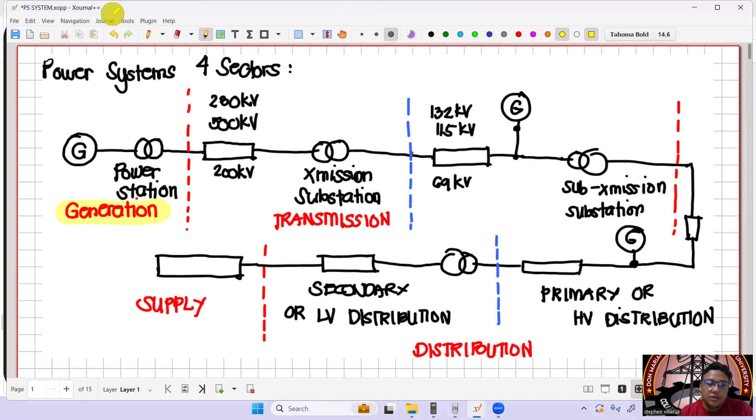Take note, our power system has four sectors. We have the generation, where the power station or power plants come in, where all the generators are. Then we have the transmission, wherein it transmits high power, then goes to our distribution, because the voltage steps down, going to the distribution utility. And lastly, we have the supply, where the consumer comes in.

In between these four sectors, it is guided by a line, which is called a transmission line. Take note, the transmission line carries our electrical power. These are called transmission lines, and these transmission lines carry high power, most commonly high voltage.

So where does the high voltage happen? In our transmission. So kilovolts are what our transmission line transmits going to distribution until it reaches the supply. Let's talk about that later on. So let's move on to our transmission line. We have the constants of transmission lines.

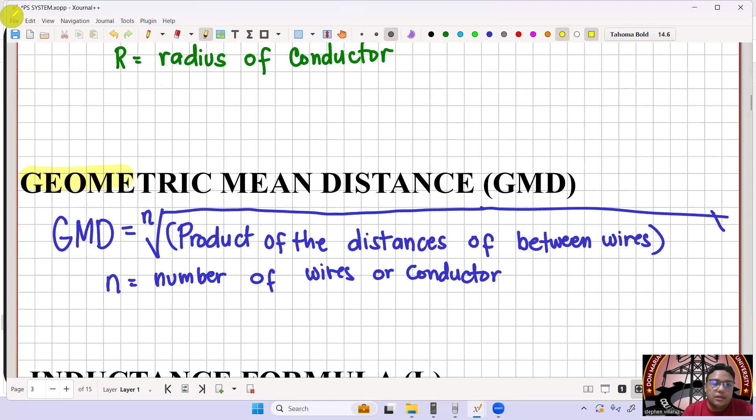We have first, the geometric mean radius, and second, we have the geometric mean distance. So what are these? When we say GMR or geometric mean radius, that is the effect of our current on the conductor itself. So your GMR is equal to the n-squared root of your self GMR multiplied by the product of the distances between the two strands.

For example, we have a stranded conductor. Most of the time, our transmission lines are stranded. We won't see a transmission line that is purely solid unless it is a cable. But for overhead transmission line, what we use is ACSR, aluminum conductor, steel reinforced.

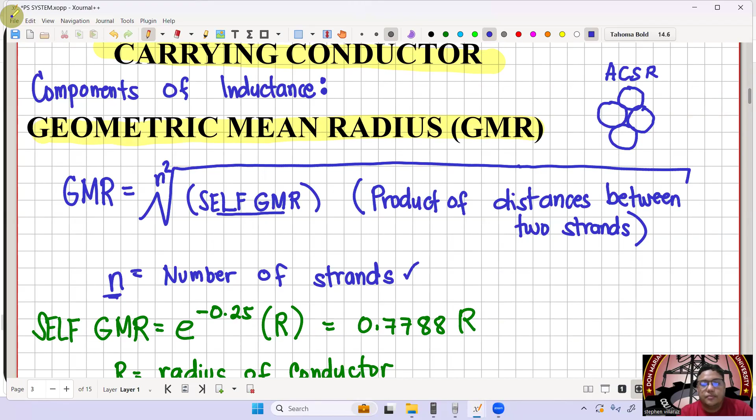So what is our formula again here? That is equal to the n-squared root of your self-GMR multiplied by the product of the distance between the two strands, wherein our n is the number of strands, and we have your self-GMR. From the word itself, self means sarili niya.

So this is now equal to e raised to negative 0.25r. So what does e to the negative 0.25 mean? This is 0.7788, times R, wherein our R is the radius of the conductor. So the radius of our conductor also has an effect on the geometric mean radius.

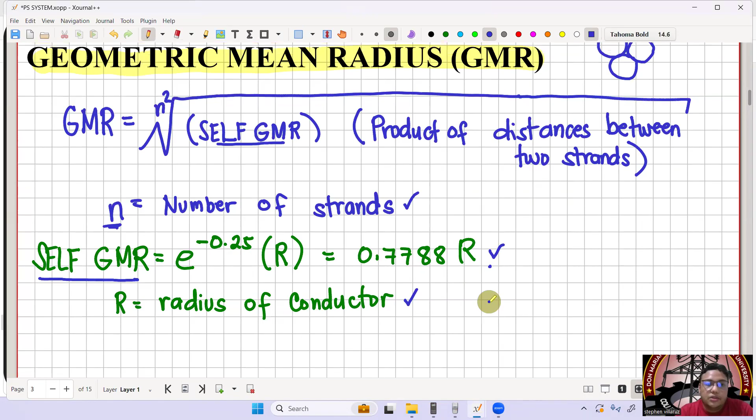Next, we have your geometric mean distance, also known as GMD. So what is this GMD? This is the nth root of the product of the distances between our wires. For example, in a three-phase system, our geometric mean distance is equal to the third root, because there are three wires, of the product of the distances between the wires. Let's say this is D12, this is D23, and this is D13.

And therefore, what's inside this is equal to the product of D12 times D23 times D13. So that's our geometric mean distance.

Sir, how about for a single wire or single phase, I should say? So paano kapag dalawang wire lang, sir? Kung ano yung distance mo dito, yun na yung GMD. So tsaka lang siya magiging komplikado kapag siya ay naka 3-phase, apat na phase. Pero most of the time, 3-phase tayo.

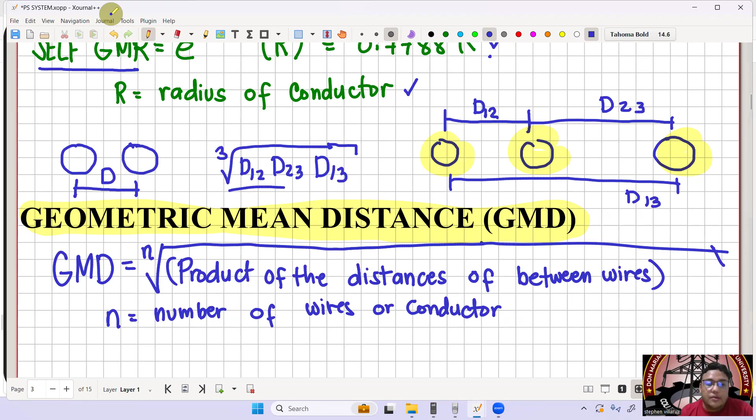Take note lang po dito, GMD and GMR. So ngayon, punta na tayo sa inductance formula. Ano naman po yung inductance formula natin?

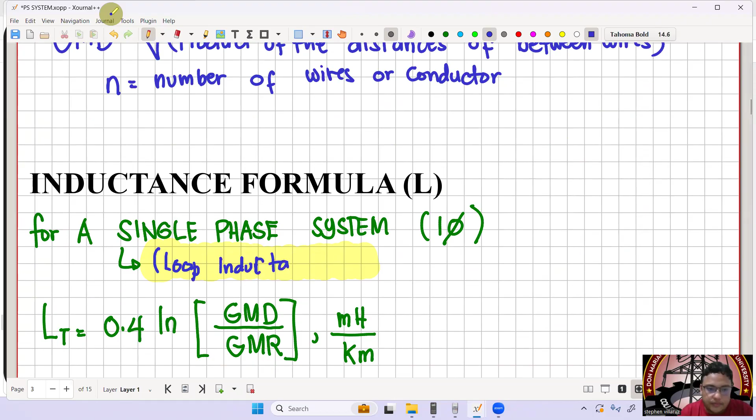So for a single phase system, your inductance will be called as your loop inductance. Yung loop inductance natin, that is equal to your total inductance.

And that is equal to 0.4 times the ln of GMD over GMR in millihenry per kilometer. Sometimes pwede rin ganito: yung 4 times 10 raised to negative 7 ln of GMD over GMR, pero siya ay naka-henry per meter naman to. It's up to you kung anong gusto nyong gamitin, yung 0.4 na multiplier or 4 times 10 to the negative 7. And this is only applicable for single phase.

Punta naman tayo sa three-phase system. So we have your L per phase or inductance per phase. So for your inductance per phase, this is equal to 2 times 10 to the negative 7 ln of GMD over GMR in Henry per meter. Or pwede rin natin gamitin yung 0.2 ln of GMD over GMR in millihenry per kilometer naman to. So yan po yung ating inductance, yung effect ng inductance dun sa ating transmission line.

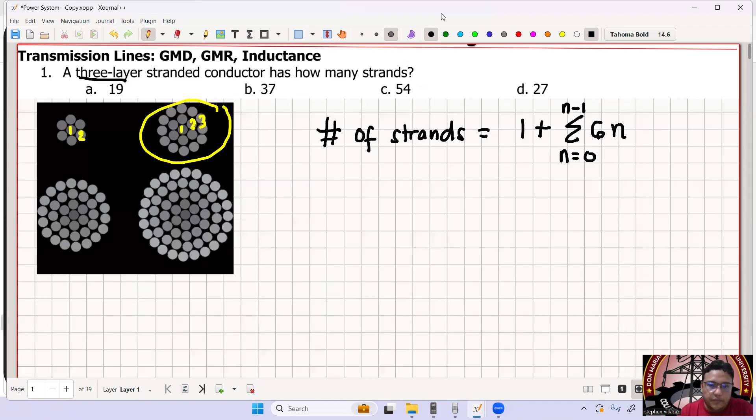So paano ba natin yan masosolve? Take note po, may formula na tayo dyan. The number of strands is equal to 1 plus the summation of 6n from n equal to 0 to n minus 1. Wherein yung ating n dito, this is the number of layers.

So kapag ilalagay natin to sa calculator, yung ating n dito, this is x. Sige, try natin siya. So that is now three layers. For a three layer, n equal to 3. Therefore here, yung ating 1 plus summation of 6x.

Take note po yung nandito, variable to. X from 0 to n minus 1. So ito lang yung magko-constant, yung n dito, number of layers. So this is now from 0 to 3 minus 1. So therefore, the number of strands is 19.

Kung gusto nyong i-check, bilangin nyo lang yung nandito na. 19 ito lahat. Ayan, so therefore, number of strands is 19. And therefore, the answer is letter A.

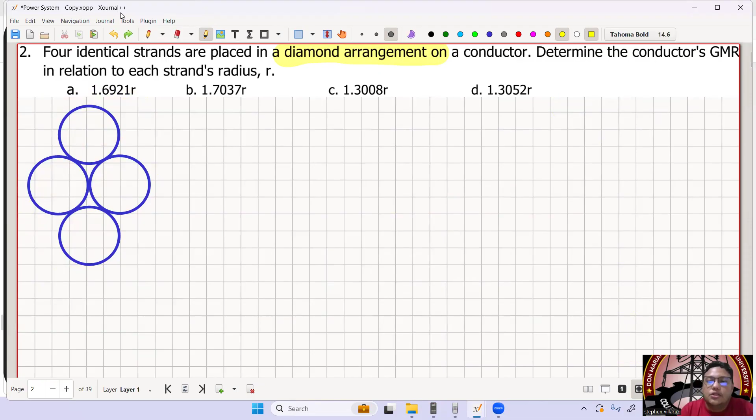So next, number 2. Let's go now to your GMR. Ito medyo kailangan natin dito mag-try ng konti. Four identical strands are placed in a diamond configuration or diamond arrangement. As you can see in the figure, naka-diamond siya. So determine the conductor's GMR. Ano daw yung GMR natin in relation to each strand's radius R? Take note po, per strand yung radius niya ay R.

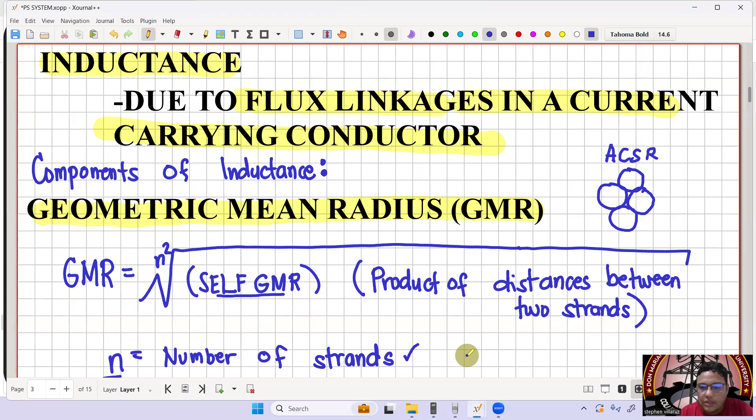So ito R. Paano natin makukuha ulit yung ating GMR? This is now equal to the n squared root of, balikan natin yung formula, self-GMR, multiplied by the product of distances between two strands.

For example, we have a diamond configuration. Let's call this strand 1, strand 2, strand 3, and strand 4. Strand 1, strand 3, strand 2, and strand 4. Ngayon, since apat na strands, n is equal to 4. Then kunin na natin yung self-GMR. Your self-GMR, from the word itself, sarili niya. So therefore, your D11 equal to D22 equal to D33 equal to D44 is your self-GMR.

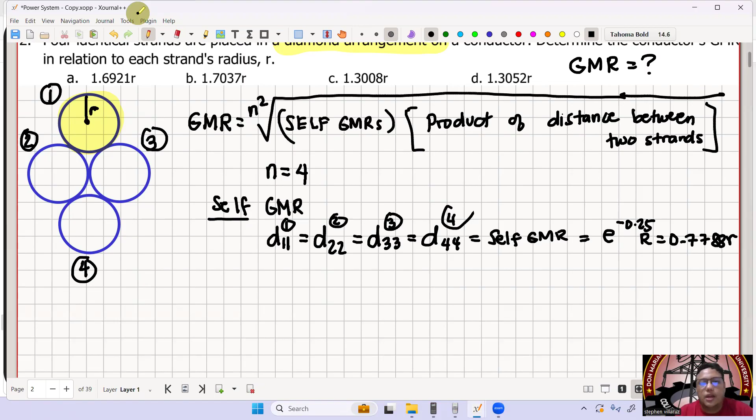Sarili niya. Ano ibig sabihin ng 11 dito? Ng conductor 1, ng conductor 2, ng conductor 3, at ng conductor 4. And this is now equal to e raised to negative 0.25, or that is equal to 0.7788 R. Ilang item na ganyan? Isa, dalawa, tatlo, apat. So, apat yung ilalagay natin dito sa loob.

Next, punta na tayo sa product of the distances between two strands. Unahin natin si 1 papuntang 2 and vice versa. So, D12 is equal to D21 is equal to what? This is R and this is R. Therefore, this is now equal to 2R.

Yung D13 at D31. So, this is R and this is R. So, this is also equal to D13 and this is also equal to D31. Ano pa? Ito at saka ito. So, this is R and this is R. So, therefore, this is also equal to 2R.

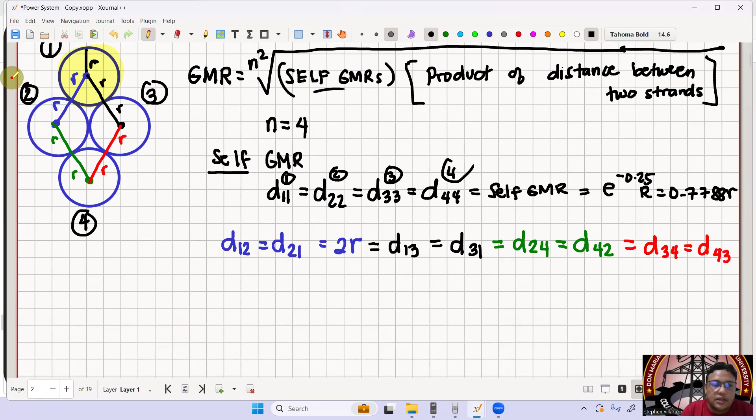So, that is D24 and D42. Ano pa? Ito. So, that is R and then R to R. So, this is also equal to D34 and this is equal to D43. Ano pa? Ito, yung nasa gitna. This is R and this is R. R plus R 2R. So, therefore, this is also equal to what?

This is also equal to D23 and equal to D32. Ayan, so ilan na? Isa, dalawa, tatlo, apat, lima, anim, pito, walo, siyam, sampo. So, 10 items ang ilalagay mo na 2R dito sa loob.

Ano pa? Take note po yung 1 going to 4. Hindi pa natin na i-take into account. So eto, gagamitin ko na lang ng color violet. Ito, papunta dito. Medyo ano natin, no? Pangit yung pagkakaano natin. Ayan siya. So, let's call this as D14. Pero, kung te-take into account natin dyan, para siyang magpo-form ng right triangle.

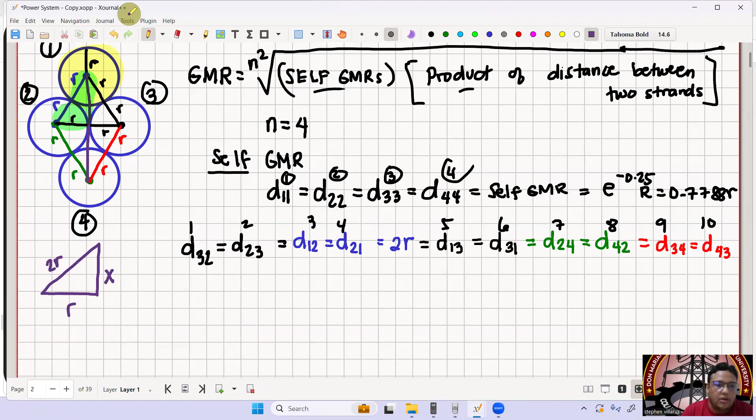So, itong portion na to, nag-form ng right triangle. Ito. So, therefore, edi kunin na lang natin yung kalahati ng D14. So, this is R, this is 2R, and this is x. So, paano natin makukuha yung x dito? So this is now by Pythagorean theorem. So therefore, x is equal to the square root of 2r the quantity squared minus r squared.

And this is now equal to the square root of 2 squared minus 1 squared. So this is equal to square root of 3 times r. Kung kukunin natin yung D14 dito, that is equal to D41, this is equal to 2x. Take note po, ito x ito, tapos dito sa baba, x rin yan. Tama po ba? Ayan, so therefore, this is now equal to twice ng square root of 3 multiplied by r. So, ilang item to? Isa, dalawa.

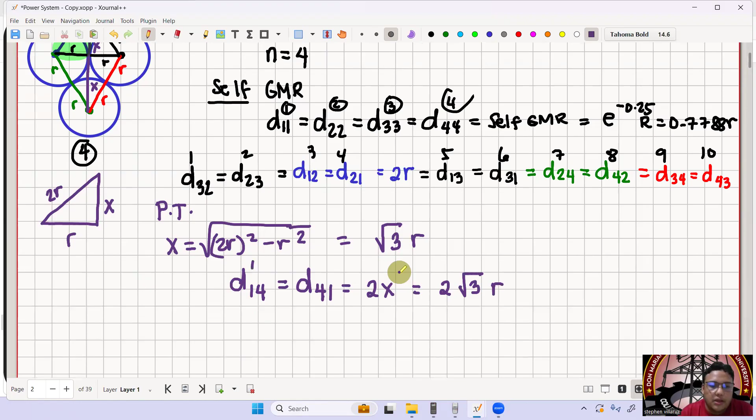So, therefore, pwede na nating i-evaluate yung formula natin. So, therefore, your GMR now is equal to 4 squared root of self-GMR. Self-GMR natin is 0.7788 R raised to what? Since apat na beses siyang naulit, so this is raised to 4, multiplied by yung 2R natin, ilang beses siya naulit? So this is 10, raised to 10, multiplied by yung ating 2 square root of 3 times r, raised to 2.

Ngayon, to check kung tama yung mga nilagay natin, dapat kung ano yung sum ng mga exponents, equal yan dun sa root. Kung ano yung root natin. So 4 squared is the 16th root, no? And then yung nasa loob natin is 4 plus 10 plus 2 is 16. So therefore, correct siya, na 16th root. So therefore, this is now equal to what?

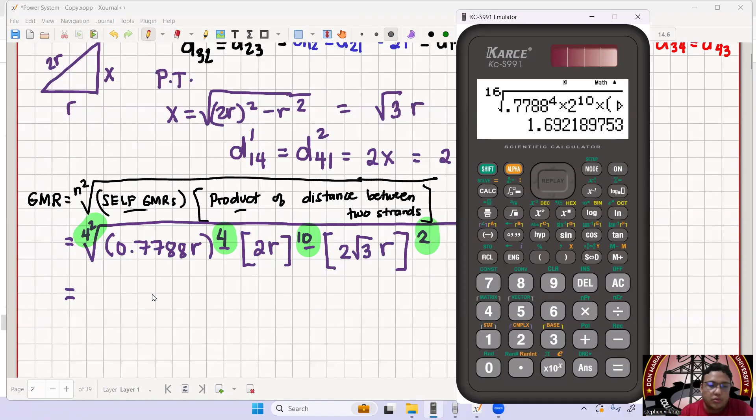So, evaluate natin sa calculator. 16th root of 0.7788 raised to 4, multiplied by 2 raised to 10, multiplied by 2 square root of 3, this is the quantity squared. So, therefore, this is now equal to 1.6922. So, 16th root of r raised to 16 is r. So, therefore, the GMR is equal to 1.6922 times r. Letter A.

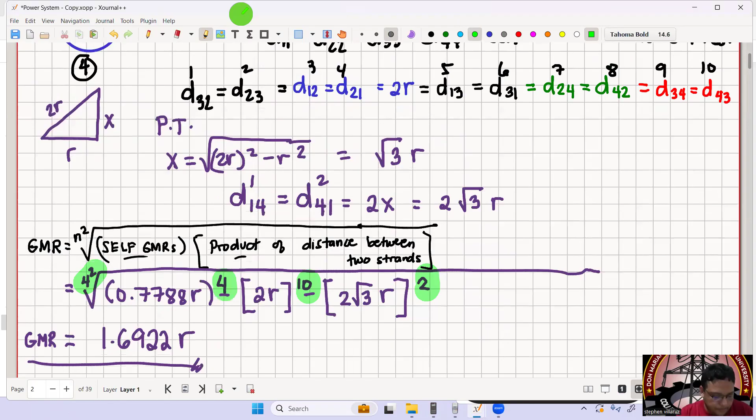Next tayo, number 3. So, a vertical arrangement of 3 similar conductors makes up a unique conductor. Meron daw tayong vertical arrangement ng mga conductors, patayo. So ito yon. So, utilizing R or radius R, yung radius natin ng isang strand dito is R. So, determine its GMR. Hanapin daw natin yung GMR.

So, take note po ulit ang GMR. This is equal to the n squared root of the self-GMRs multiplied by the product between two strands. So, products between two strands.

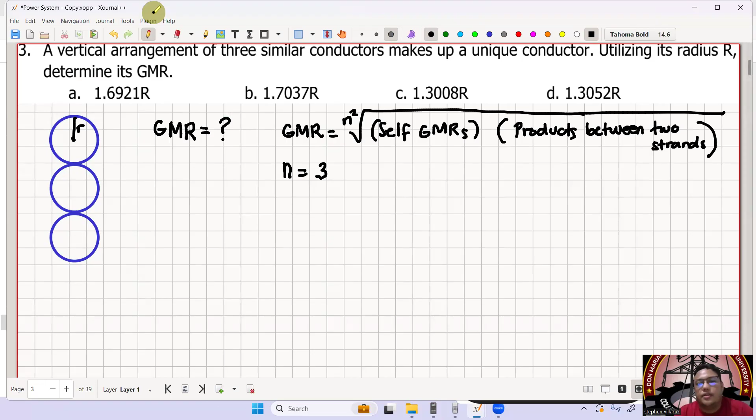Okay, so ilang strands meron tayo dito? So, 3. Okay, so therefore GMR natin ngayon, this is now equal to 3 squared, so this is 9. So this is the ninth root of self-GMR.

So ano yung mga self-GMR natin dito ulit? Let's call this as strand 1, strand 2, strand 3. Okay, so self-GMR, that is D11, equal to D22, equal to D33.

And this is equal to 0.7788 times R. Okay, ilagay natin dito, 0.7788 times R. This is the quantity cubed. So tatlong beses kasi siya - isa, dalawa, tatlo.

Then after which, yung product between two strands. So dito, that is now from D1 going to 2. So this is R, then R. So R plus R is 2R. Therefore, 2R is equal to D12.

This is also equal to D21. This is also equal to what? Okay, ano pa yung may 2R dito? Okay, yung D23. So from conductor to conductor 3, 2R rin yan. So this is equal to D23 and this is equal to D32.

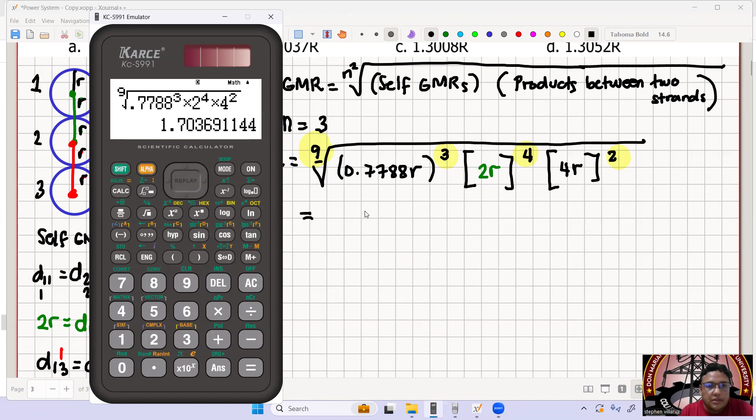So therefore this is now equal to 1.704. So 1.70, lagay ko na lang for decimal place, 37. So 37 times R. So this is your GMR. And this is letter B.

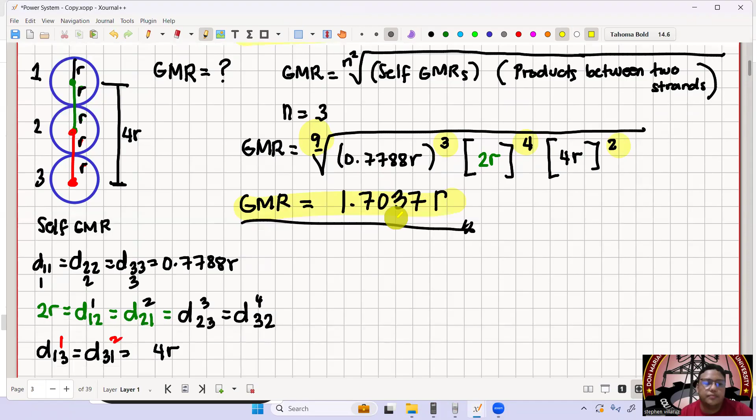Okay, so next tayo. Number 4. Okay, number 4 tayo. So punta na tayo sa inductance, no? Okay, inductance na, tapos na tayo sa GMR. So inductance na tayo. So the overall inductance of a 20-kilometer single-phase line.

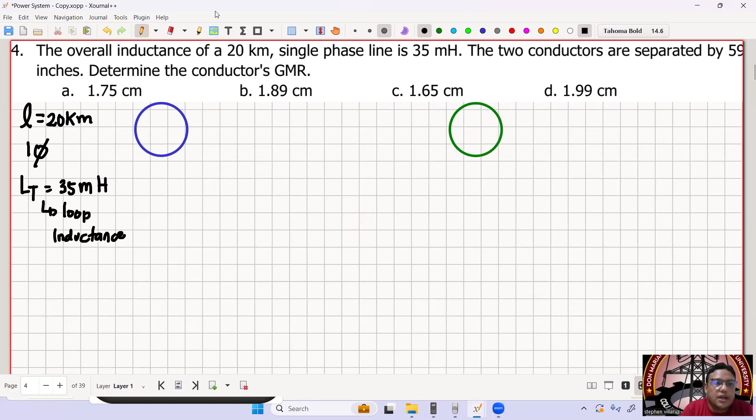So take note po, okay, yung length natin dito, 20 kilometers. Okay, yung ating system is a single phase. And yung ating overall inductance or total inductance dito, that is equal to 35 millihenry. So take note po, this is a loop inductance. Bakit loop inductance? Kasi siya ay single phase. Okay, single phase siya, kaya tinawag na loop inductance.

So the two conductors are separated by 59 inches. Okay, so yung separation nila, 59 inches. So determine the conductor's GMR. Okay, so take note po, hahanapin natin daw yung GMR.

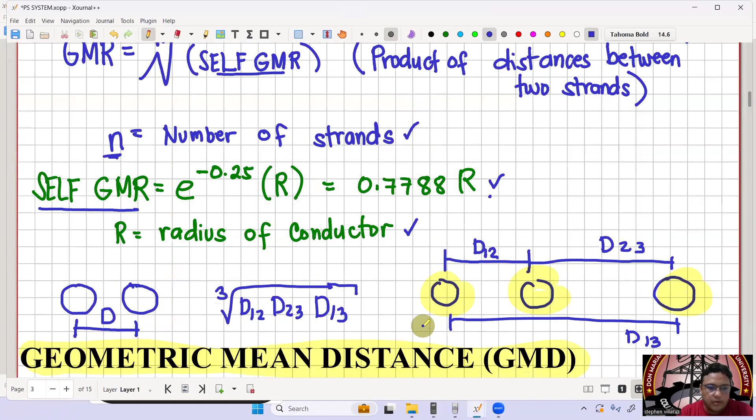Okay, so for a single phase inductance, so this is your loop inductance. And kapag loop inductance, so going back to the formula, single phase, dito, so kapag single phase, 0.4 ln of GMD over GMR in millihenry per kilometer. So therefore LT now is equal to 0.4 ln of GMD over GMR, and this is in millihenry per kilometer. So i-discuss ko lang yung formula sa inyo, no?

So take note po dito, naka-enclose yung ln sa GMD over GMR. So ang conditions dito is what? So yung conditions dito is that same yung units, yung GMD at saka yung GMR. So otherwise, kung hindi sila same units, you need to convert, okay? Kasi dito, ang mangyayari dito, magka-cancel lang yung unit dito.

Okay, ang magke-carry over ng overall units natin dito, so ang i-carry over na unit niya is millihenry per kilometer. Pero yung nandito sa loob, magka-cancel kasi to. Okay, magka-cancel yung unit natin dyan. Okay, kaya dapat same dapat yung units. Okay, ganun rin dito sa three-phase system, no? So kalimitan na mali ng mga estudyante is that hindi sila nagko-convert. Tamad silang mag-convert. Okay, so kailangan lang nating pagpasensyahan itong formula na to. Kasi kailangan nyo talaga mag-convert.

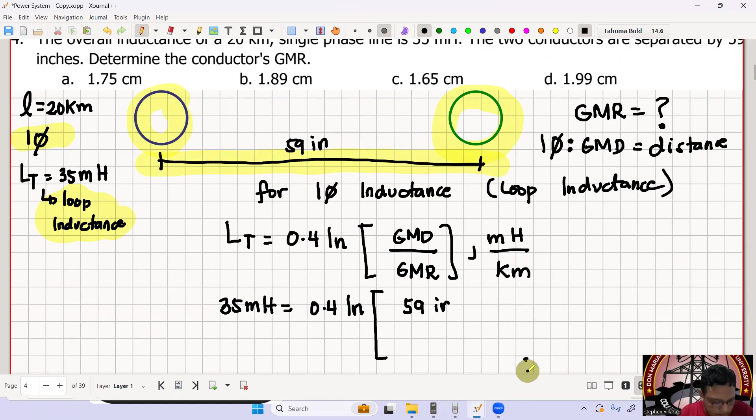So, that is now equal to 59 inches. Is this the unit we want? Not yet, because the unit we want is centimeters. So the unit inside our working equation should also be in centimeters.

So we need to convert. This is now multiplied by: 2.54 centimeters is 1 inch. So all over GMR, this is the unknown, and this is in millihenry per kilometer.

But we still have per kilometer here. So what do we do with the per kilometer? Since the left side is only in millihenry, we multiply by the length, which is 20 kilometers. Let's see what cancels out: millihenry, millihenry cancel, kilometer, kilometer cancel, inch and inch cancel. So what remains is centimeter. So what's your GMR in centimeters?

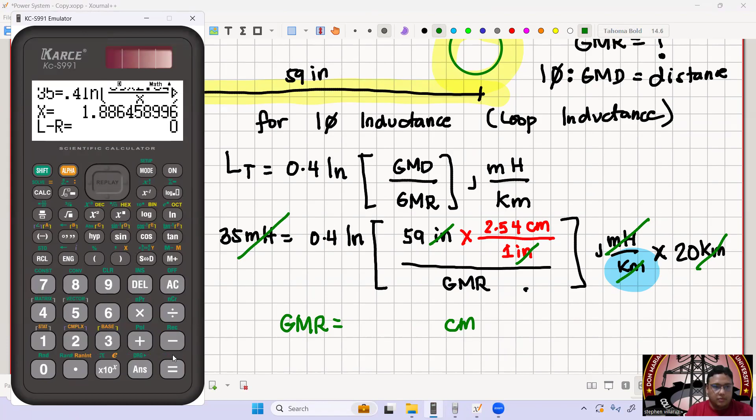So, 35 equals 0.4 ln of 59 times 2.54 all over x, multiplied by 20. So this is now equal to 1.886, or 1.886 centimeters, that is 1.89 centimeters. And this is letter B.

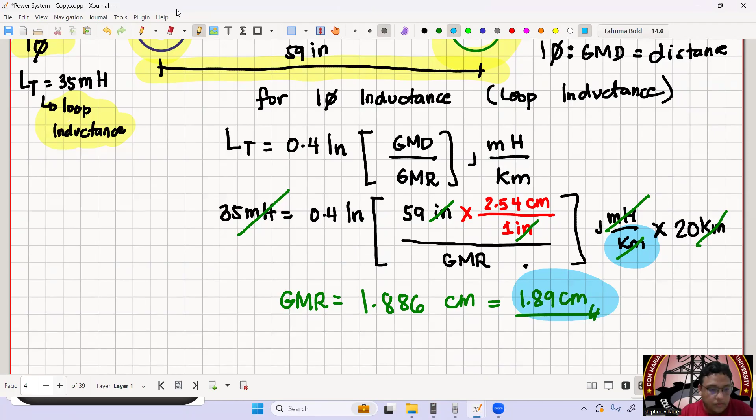Number 5. This is three-phase now. So the conductors in a three-phase, take note, three-phase, 60 Hertz transmission line are organized in a triangular configuration, as you can see in the figure. It's a triangle, with two conductors spaced 5 meters apart, and a third at 8 meters.

So here, the spacing is 5 meters, here 5 meters, and here 8 meters. Those are their spacings. Now, the conductors are 0.25 inches in diameter on the exterior. So determine the transmission line's inductive reactance in ohms per kilometer for each phase.

Take note, inductive reactance is what we want. So therefore, XL - from your circuits subject, that's XL, but per phase. So that's what's being asked. So, what's XL per phase? What's the formula for that? That is 2 pi times F times L per phase.

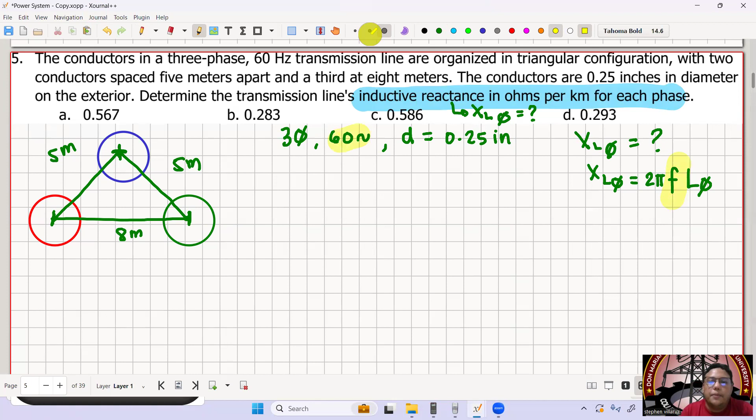We already have F here, but unfortunately we don't have L per phase yet, so we need to get that. And since this is a 3-phase system, the L per phase formula is: 0.2 ln of GMD over GMR, in millihenry per kilometer.

So this is now equal to what? Our L per phase is now equal to 0.2 ln of GMD. But what's your GMD? Since it's 3-phase, we take the cube root. Cube root of 5 times 5 times 8, and this is in meters.

All over GMR. Take note, our GMR here is equal to 0.7788 times R. Let's place that here: 0.7788 times R. But what's your R? We don't have R, we were only given the diameter.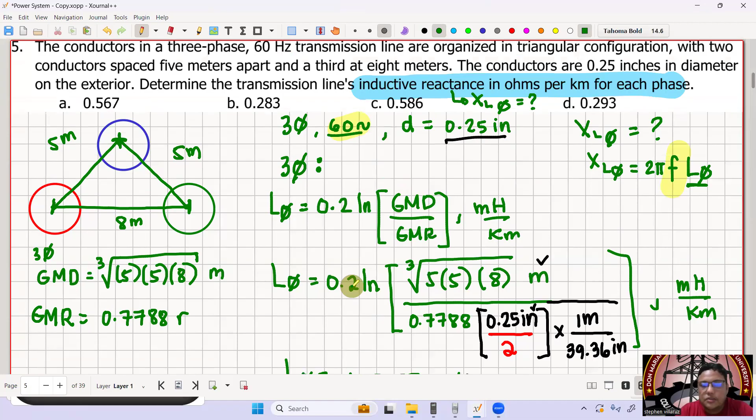Now we can get the XL per phase. Using this formula, XL per phase is now equal to 2 pi times F times L per phase. So this is now equal to 2 pi times the frequency. What's our frequency? 60 Hertz, multiplied by 1.5537 times 10 to the negative 3, because it's milli.

This is where our students often make mistakes again. So when using 0.2 ln, please take note, it's milli, so times 10 to the negative 3. So this is in Henry per kilometer. So this whole thing becomes ohms.

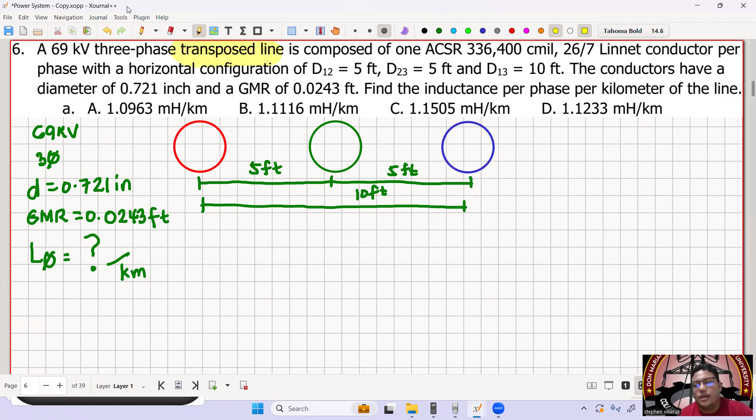When we say transposition, this is used in practice. This is used by NGCP and different electrical transmission companies. So take note of what happens.

In practice, the three conductors of a three-phase line are seldom equilaterally spaced. Why is it not equilateral? Because there are unequal inductances in our three-phase system.

This leads to unequal voltage drop. So to achieve balance or to offset this imbalance, the position of the conductors is interchanged along the line.

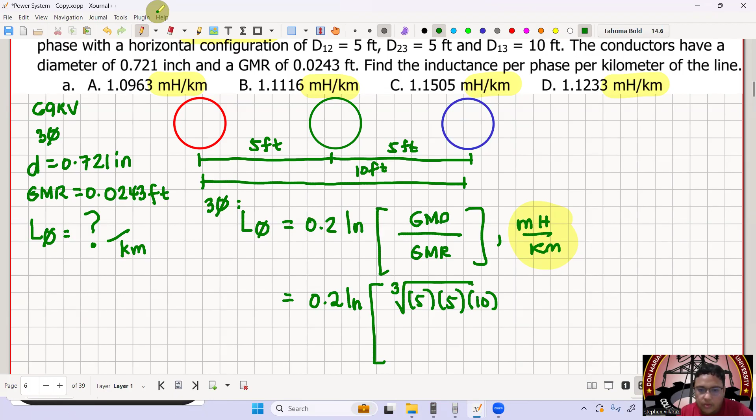This is now equal to 0.2 ln of, take note, our GMD — since it's three-phase, we take the cube root: cube root of 5 times 5 times 10, in feet, all over our GMR, which is given as 0.0243 feet, and this is in millihenry per kilometer.

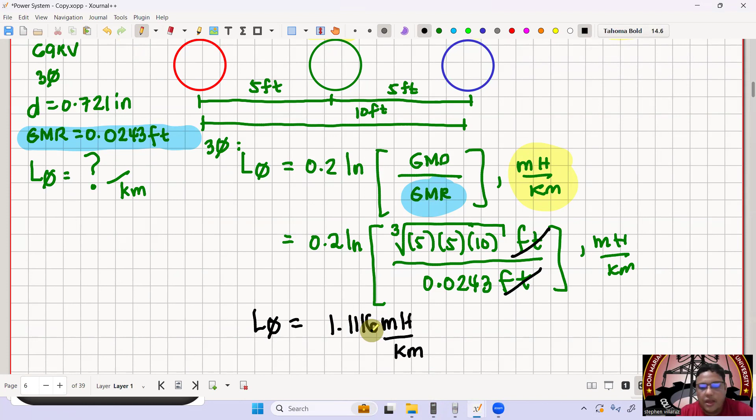Are the units inside compatible? Yes, perfectly compatible, so they cancel out and we can evaluate. So L per phase is 0.2 ln of cube root of 5 times 5 times 10, all over 0.0243, in millihenry per kilometer. That gives us 1.1116 millihenry per kilometer. So the answer is letter B.

Okay, let's move to the next topic: bundled conductors. Why do we bundle conductors? First, it's to reduce inductance, which reduces the effect of inductance on our circuit. When inductance is reduced, efficiency increases and we get better percent regulation. Also, we bundle conductors to reduce skin effect.

Skin effect happens because when our current is AC, it tends to focus only on the outer covering of the conductor. So all the current is there, none in the middle. That's the effect of AC when it comes to skin effect — from the word 'skin' itself, referring to the outer covering.

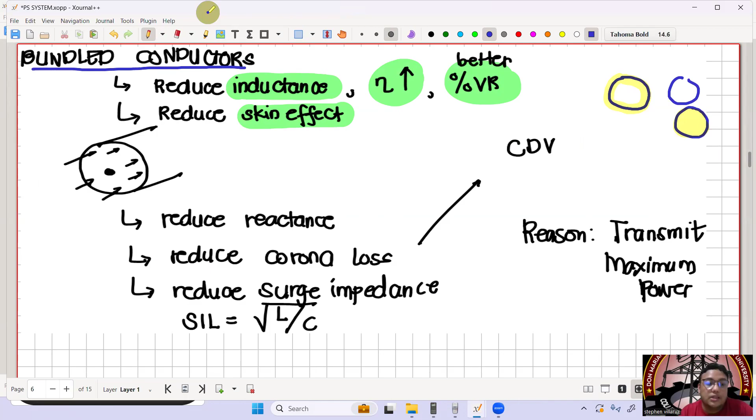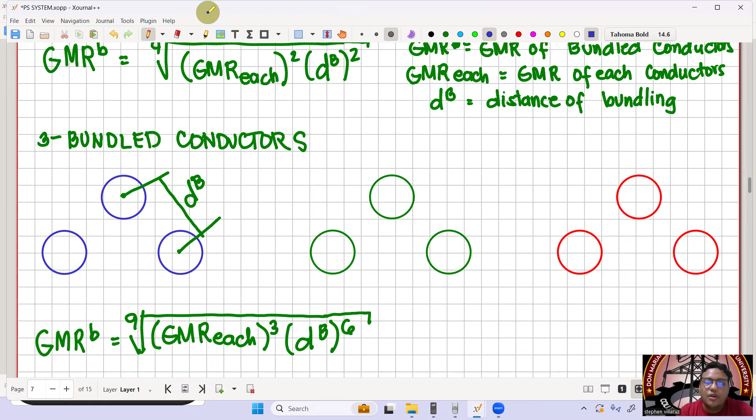For example, here we have two bundles, meaning two conductors per phase. We also have 3 bundled conductors, meaning 3 conductors per phase. And aside from 3 and 2, there's also 4 bundled conductors per phase — phase A, phase B, phase C. Usually, as the voltage carried by the transmission line increases, it has more bundles.

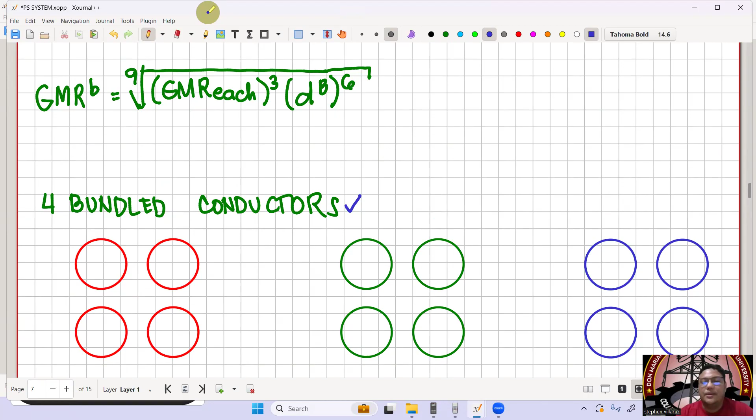Okay, so for two bundled conductors, take note po dito. Isa sa alang-alang natin yung ating dB, this is the distance of bundling, yung distansya ng bundled conductors natin. So we have also your GMR each, GMR ng kada conductors natin. Take note po, may GMR to, may GMR to, pare-parehas lang yung GMR niyan.

And also yung ating GMR bundled, GMRB. GMRB is the GMR of bundled conductors, parang overall GMR kumbaga. So therefore yung GMR bundled natin, that is equal to the fourth root of GMR each squared multiplied by distance of bundling squared. Or pwede rin natin tong isaayos, gawin natin siyang square root na lang. So for two bundled conductor, GMR bundled is equal to the square root of GMR each multiplied by the distance of bundling. So ito na lang gamitin natin, ito, simplified na kasi siya.

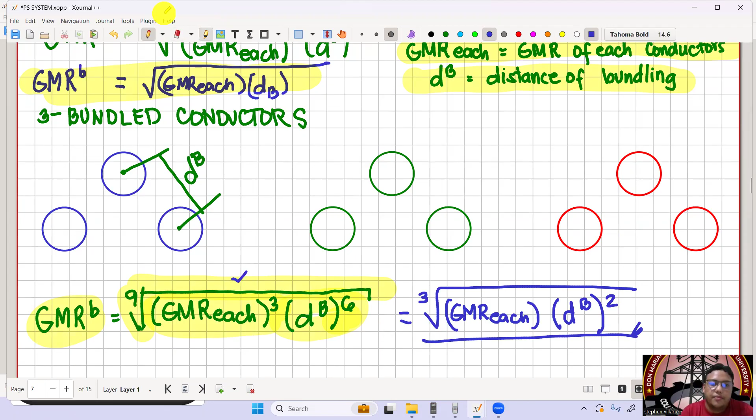Okay, so for 3 bundled naman, that is now equal to what? GMR bundled is equal to the 9th root of GMR each raised to 3 multiplied by distance of bundling the quantity raised to 6. Or pwede rin siyang cube root of GMR each multiplied by distance of bundling the quantity raised to 2. Pwede rin yan, so pwede nyo rin tong gamitin instead na ito na lang.

For 4 bundled conductors, that is 1.09 multiplied by the fourth root of GMR each multiplied by distance of bundling the quantity raised to 3. And for the inductance per phase of bundled conductors, yung ating L per phase now for bundled conductors is 0.2 ln of GMD per phase all over GMR bundled, in millihenry per kilometer. Yung ating GMD dito, GMD na lang yan, parehas rin yan, GMD per phase or GMD.

Sige, try nating magsagot. Number 7, ito, bundled conductors. A 230 kilovolts, 60 hertz, three-phase circuit transposed transmission line is made up of two 1,272 MCM 54/19 conductors, meaning two conductors per phase, and this is arranged horizontally or pahiga.

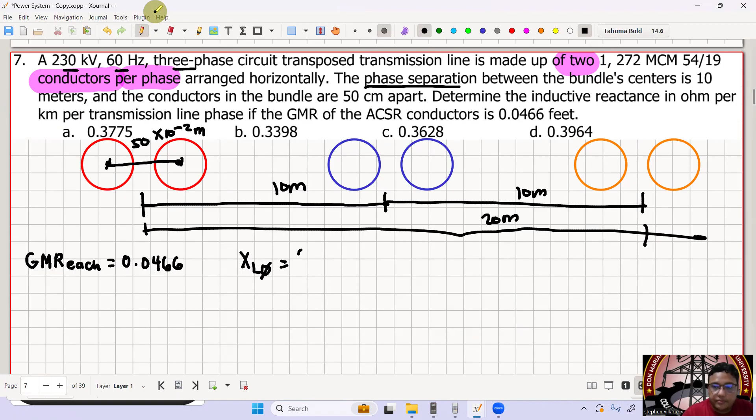So hinahanap is XL per phase. Paano na yan? Take note po, XL per phase is equal to 2 pi F times L per phase. But for bundled conductors, yung ating L per phase is equal to 0.2 ln of GMD over GMR bundled, this is now in millihenry per kilometer. And for two bundled conductors, yung ating GMR bundled is equal to the square root of GMR each multiplied by the distance of bundling.

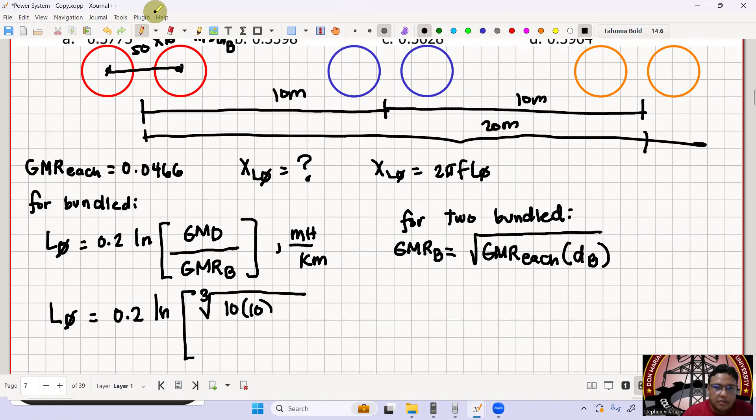So yung distance of bundling natin dito is 50 centimeters. Okay, so therefore this is now equal to: L per phase is equal to 0.2 ln of GMD, cube root of 10 times 10 times 20, this is in meters, all over GMR bundled, square root lang yan, square root ng GMR each.

So this is naka-feet na 0.0466 feet, pero hindi pa yan match dito, hindi yan match dito sa numerator natin. So we need to convert. This is now multiplied by, in 1 meter, ilang feet? 3.28 feet, multiplied by the distance of bundling. So ilan yung distance of bundling natin? 50 times 10 to the negative 2, and this is in meters. So since compatible na yung mga to, cancel lang ito.

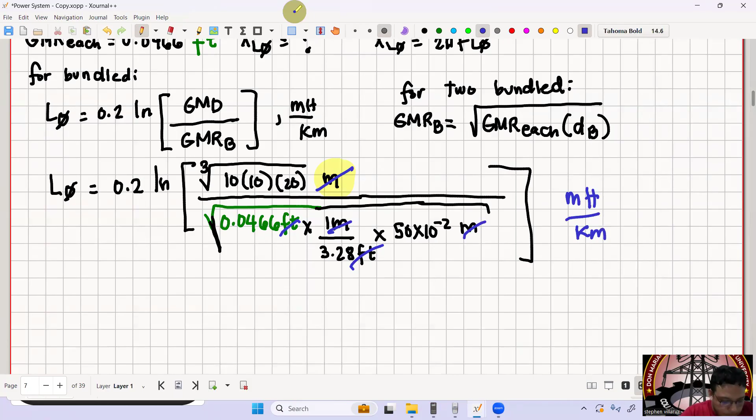Ayan, so this is now in millihenry per kilometer. Therefore L per phase now is equal to 0.2 ln of cube root of 10 times 10 times 20 all over square root ng 0.0466 times 1 over 3.28 times 50 centi. So therefore this is now equal to 1.00144 millihenry per kilometer. Or this is now equal to 1.00144 times 10 to the negative 3 Henry per kilometer.

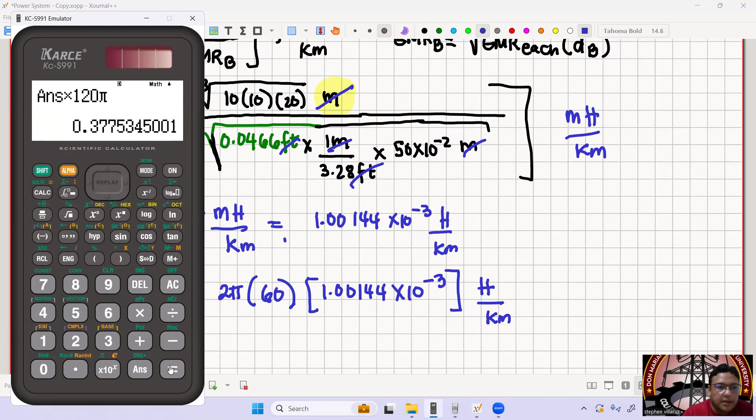Ayan, so therefore anong gagawin na natin dito? Pwede na natin siyang ilagay sa XL per phase. So XL per phase is 2 pi F L per phase, this is now 2 pi times frequency, ilang frequency natin? 60 hertz, multiplied by your L per phase, 1.00144 times 10 to the negative 3 Henry per kilometer. So times 10 to the negative 3 lang natin to, multiplied by 120 pi. So therefore this is now equal to 0.3775 ohm per kilometer, letter A.

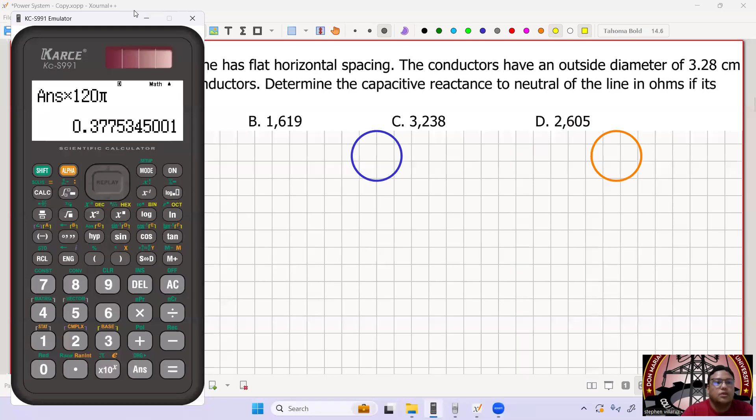Okay, next tayo, number 8. So a three-phase 60 hertz line has a flat horizontal spacing. So the conductors have an outside diameter of 3.28 centimeters with 12 meters between conductors.

Take note po dito, iba na yung hinahanap dito, no? Capacitive reactance na. So let us talk about the third constant of your transmission line, which is your capacitance.

Okay, so yung capacitance natin usually, ang model niyan sa transmission lines natin is always nakadirect sa ground. So para siyang nakashunt. Ayan, so this is your capacitance.

Okay, and your capacitance now, the shunt capacitance per unit length of a single phase two-wire transmission line is given by this formula. So kapag single phase, ito. So always siyang nakashunt, yung capacitance natin, shunt yan. So C is equal to pi epsilon naught over ln of D all over R.

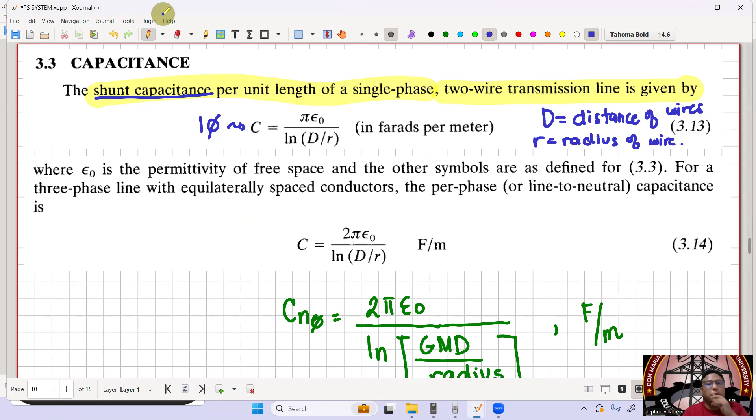So wherein yung D natin, this is your distance of wires. And yung R, this is the radius of your wire or conductor. Okay, so kapag naman siya ay three-phase...

So ito naman yung gagamitin natin, this is for three-phase. So C is equal to 2 pi epsilon naught all over ln of D over R. So wherein yung D natin dito ay equal to your GMD, and your R is your radius.

Okay, or this is now equal to what? So this is your C per phase. So anong basa dito? So this is your capacitance to neutral. So capacitance to neutral per phase is equal to 2 pi epsilon naught all over ln of GMD over your radius.

And this is in farad per meter. Take note lang ulit dito sa loob, katulad lang doon sa L natin, so yung units dapat dito are the same. Okay, so yung GMD mo kung meter yan, dapat yung radius mo meter rin, kasi ang magpre-prevail na unit dito sa overall na ito is yung farad per meter lang. So dapat compatible yung units mo dito sa loob, compatibility ang hinahanap natin dito.

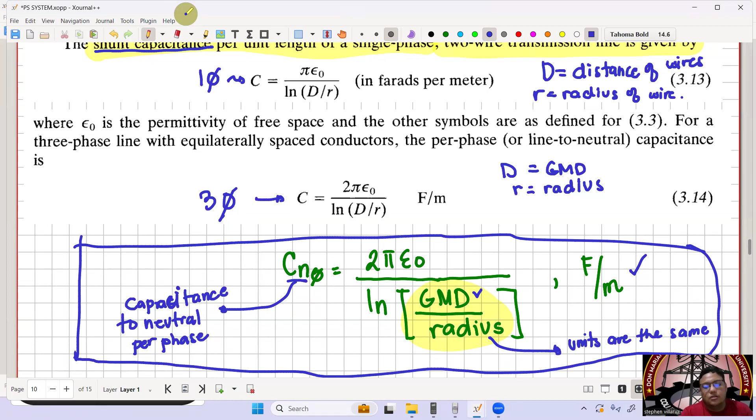So ito ang usually na nagagamit natin kapag capacitance to neutral per phase when it comes to three-phase. Okay, and how about naman yung reactance? Kanina sa problem natin, reactance yung hinahanap, no? Okay, so yung ating XC per phase now is equal to, from your circuits 2, that is 1 over 2 pi F times yung ating C per phase.

Sige, let's try to solve number 8. So a three-phase 60 Hz line has flat horizontal spacing, so nakahiga, horizontal. So the conductors have an outside diameter, yung D natin dito is 3.28 centimeters, with 12 meters between conductors. So ito, 12 meters, ito, 12 meters, ito, 24 meters.

So determine the capacitive reactance to neutral of the line in ohms if its length is, yung length binigay, this is equal to 125 miles. Okay ayan, so XC yung hinahanap.

Pero ano ulit yung XC ulit? So that is equal to 1 over 2 pi F times C per phase. Pero wala pa tayong C per phase, okay, so kunin lang natin siya.

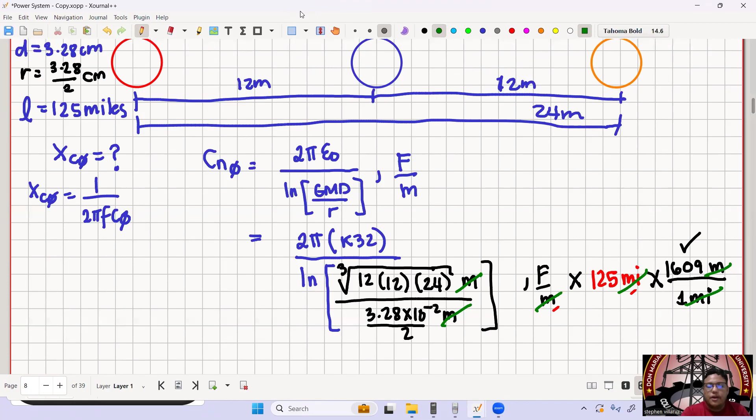So ilan na to? So this is now 2 pi times constant 32 all over ln ng cube root ng 12 times 12 times 24 all over 3.28 over 2. So this is in farad per meter multiplied by 125 times 1,609. So therefore, this is now equal to... kulang pa. Kalimutan ko yung times 10 to the negative 2 dito.

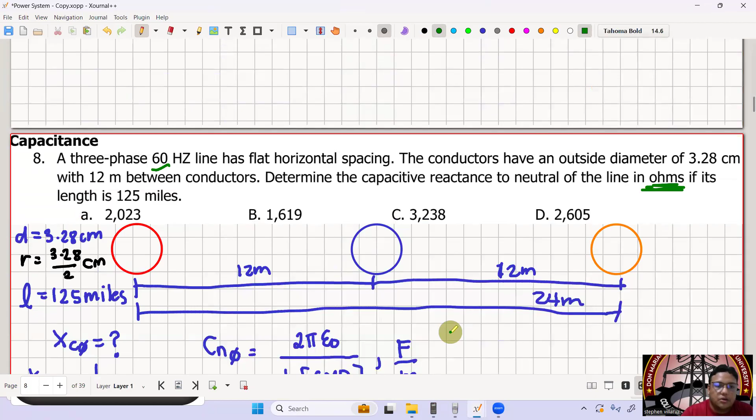Ayan siya. Okay, so this is now 1.639 times 10 to the negative 6. So 1.639... 0.83341 times 10 to the negative 6. So this is in farads na, microfarads. Okay? Then kunin na natin yung x per phase natin or xc per phase. So that is now 1 over 2 pi fc per phase. So this is now 1 all over 2 pi times f. Ano yung f natin? So ilang hertz? 60 hertz. Multiplied by 1.639083341 times 10 to the negative 6. So lahat to ohms na to. So 1 all over 2 pi times 60 times answer. So therefore, this is now equal to 1,618.33. So 1,618.33 ohms. Or this is approximately equal to, okay, letter B.

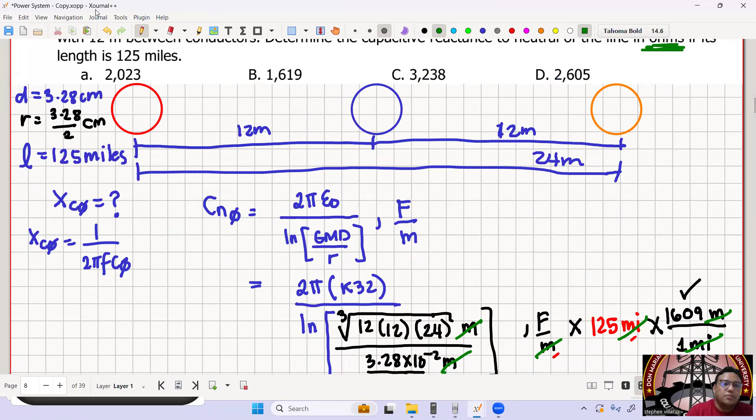Okay, let's move on to number 9. So a 115 kV three-phase transposed transmission line is composed of two ACSR conductors. So dalawang ACSR of 336,400 circular mil, 30 over 7 Oriole conductors. So two ACSR conductors per phase. So meaning siya ay two bundled.

Okay, two bundled. So with horizontal configuration, D1 going to 2 is 7 feet. D2 going to 3 is 7 feet. And D1 to 3, that is equal to 14 feet. So the line spacing is measured from the center of the bundled conductors. So the distance between the conductors of the bundle is 6 inches. So the conductors have a diameter of 0.741 inch. So D is equal to 0.741 inch. And GMR, that is equal to 0.02255 feet.

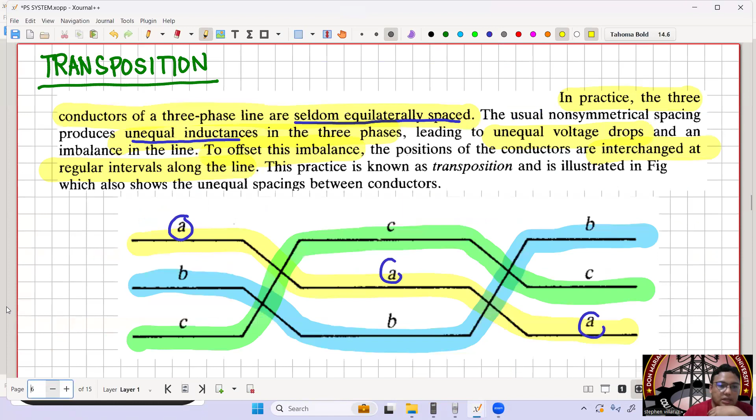So kung meron tayong L per phase kanina na bundled, meron rin sa capacitance. Okay? So take note lang po dito. So for two bundled siya. Okay? So instead na GMR each yung gagamitin natin dito. So kanina dito kasi is GMR each. So eto, instead na GMR each, papalitan lang natin yan ng radius. Okay, ng R. Okay? So RB, radius of bundling na yan.

So yung RB natin or yung GMR bundled sana natin is yung ating radius of bundling. So this is the overall radius. So yung R each naman, that's the radius of each conductor. So kada conductor dito. Then we have also your dB, which is your distance of bundling. Ngayon, kukunin lang natin yung radius of bundling, that is equal to the fourth root of RH squared multiplied by your dB, the quantity squared. Or pwede pa natin yung i-simplify, that is now equal to the square root of RH or radius of each conductor multiplied by the distance of bundling.

For 2 bundled. So for 3 bundled naman, palitan lang natin yung GMRH dito ng RH. Then dito, GMR bundled, palitan lang natin ng R bundled. Okay? Radius lang lagi dito. So therefore, yung radius of bundling natin is equal to the 9th root of RH, the quantity cube, multiplied by distance of bundling raised to 6. Or this is now equal to the cube root of RH multiplied by distance of bundling the quantity raised to 2. Ayan, so ito na lang gamitin natin.

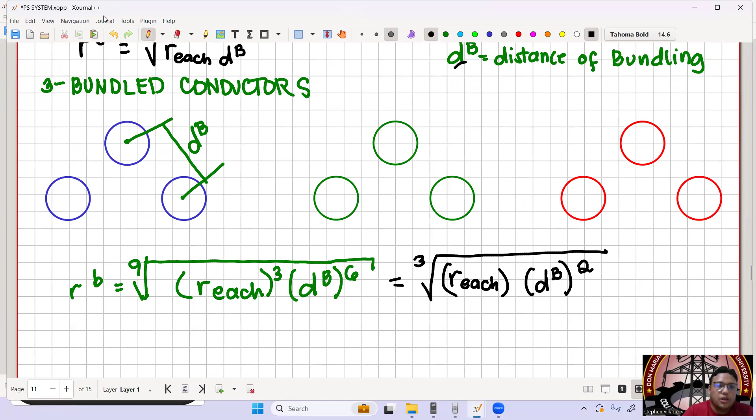For 4 bundled conductors, yung ating RB or radius of bundling is equal to 1.09 times the fourth root of RH multiplied by yung ating distance of bundling, the quantity cube. Okay? And for bundled conductors, yung ating capacitance to neutral per phase is equal to 2 pi EO all over ln of GMD over the radius of bundling. So this is now in farad per meter. Okay, so sige, ayun natin siya.

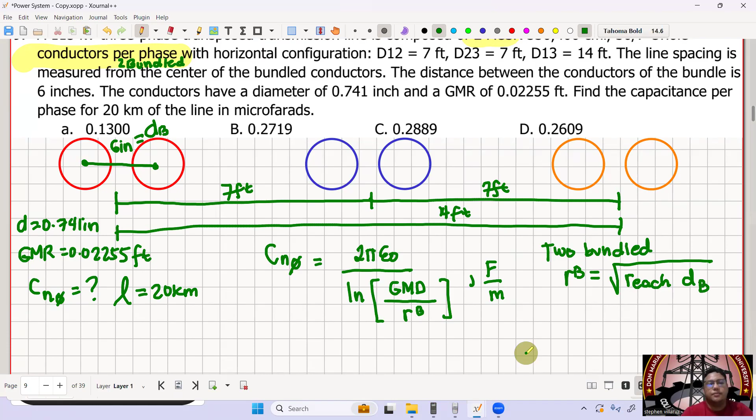Balikan lang natin to. Okay? 2 bundled siya. So therefore, yung ating capacitance to neutral per phase is equal to 2 pi times EO all over ln ng GMD all over radius of bundling. So this is now in farad per meter. But your radius of bundling for 2 bundled, yung ating RB, is equal to square root ng RH multiplied by your distance of bundling. Okay? Ayan, so apply natin yan dito, no? Kagad. So therefore, this is now capacitance to neutral per phase is equal to 2 pi times EO, constant 32, all over ln ng GMD.

So, ano yung GMD natin dito? Cube root. So, cube root ng 7 times 7 times 14. This is in feet. All over radius of bundling natin.

So, RH is wala pa. Take note po dito, may diameter tayo dito na 0.741. So, gawin lang natin yung radius. So, this is now R is equal to 0.741 divided by 2 in inches. Okay? So, sige natin.

0.741 over 2, but this is in inches, so we need to convert. I-convert natin yan into feet kasi yung numerator natin dito sa taas or yung GMD natin naka-feet. So, this is now multiplied by 1 foot, that is 12 inches.

Okay, ano pa? Yung distance of bundling natin. So, ilan yon? So, 6 inches. So, multiply lang ulit tayo ng conversion factor. 1 feet or 1 foot is 12 inches.

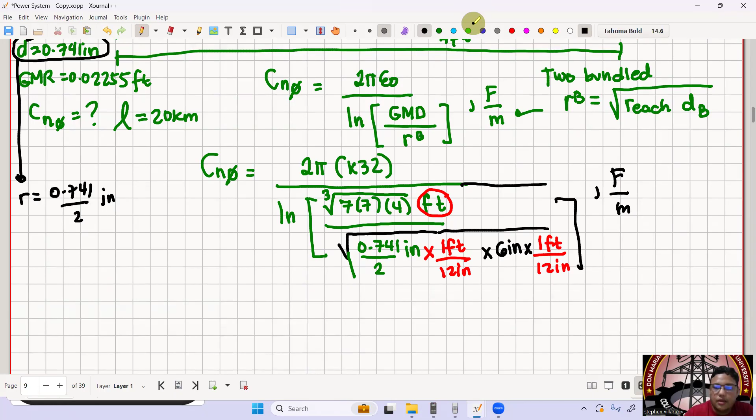So, this is now in farad per meter. Okay, so therefore, this is now equal to what? Okay, so farads yung gusto natin dito. Multiply pa natin yan sa length pala. Okay, nakalimutan natin yung length. Kasi naka-farad per meter na to, no? So, multiply lang natin sa length. So, multiply it by 20 kilometers or that is 20,000 meters. So, ano na magka-cancel dito? So, yung meter at saka yung meter, cancel yan. So, ano pa? Inches, inches. Feet, feet, then feet dito.

Okay, so therefore, what's now your capacitance to neutral per phase? So that is now 2 pi times constant 32 all over ln ng cube root of 7 times 7 times 14. Yan. So before natin makalimutan, 14 all over

square root ng 0.741 over 2, times 1 over 12, times 6 times 1 over 12. So close parenthesis dito. Then dun sa labas, i-multiply natin ng 20,000.

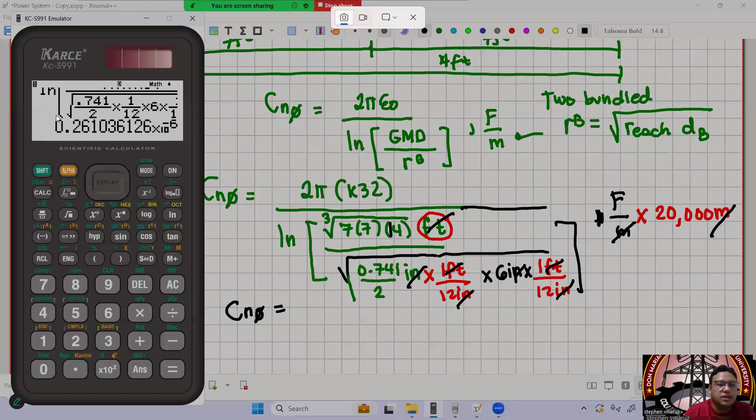So therefore, this is now equal to 2.610 times 10 to the negative 7, or i-shift lang natin siya. So ito na yung magiging sagot natin. So this is in microfarads. So that is 0.2610 times 10 to the negative 6 farad, or this is 0.2610 microfarads.

Letter, okay, letter D.

Okay, number 10. So calculate the capacitive reactance in kilohm kilometer of a bundled 60 hertz three-phase line having 3 conductors per bundle. So tatlong conductors na to per bundle. So between conductors of the bundle, sorry, ulitin ko. So three-phase having 3 conductors per bundle with 45 cm between conductors in bundle.

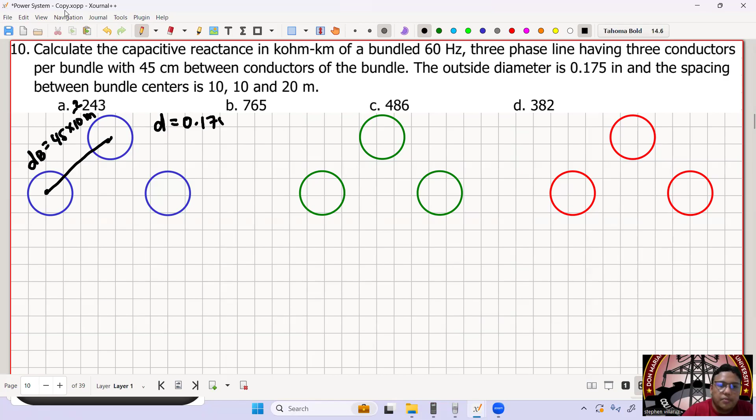So yung distance of bundling daw natin dito, so dB is equal to 45 times 10 to the negative 2 meters. So outside diameter, so yung D natin is equal to 0.175 inch and the spacing between the conductors is 10, 10, then 20. Okay, 20 meters. Yan.

Sige. Ano lang natin siya. Solve na natin yung ano dito. Capacitive reactance. So, XC. So, pero wala pa tayong C per phase. Okay, kunin muna natin yon.

Cn per phase is equal to 2 pi times ε0 all over ln ng GMD over R bundled. This is in farad per meter. Take note po, 3 bundled siya.

So therefore, yung radius of bundling mo is equal to the cube root of R each multiplied by, okay, distance of bundling, the quantity is squared. Okay? So sige, lagay na natin.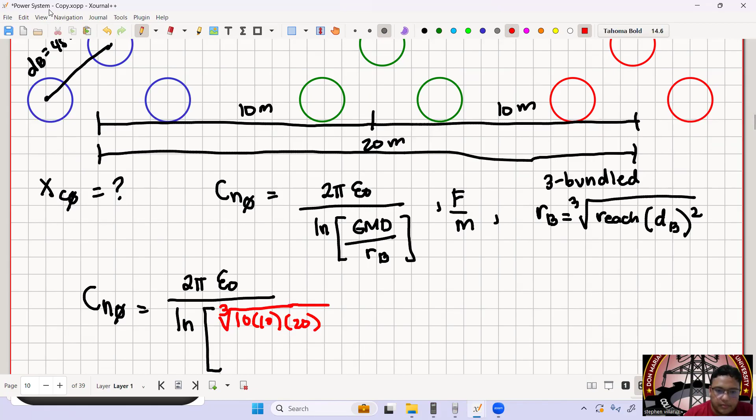So capacitance to neutral per phase now is equal to 2 pi EO all over ln ng GMD. So that is cube root. Okay? Cube root ng 10 times 10 times 20. So this is in meters all over yung ating R bundled.

So this is now cube root ng, okay, radius each, or tama, radius of each conductor.

So this is now available in diameter. So anong gagawin lang natin dito? Gawin nating radius. So therefore, this is R now is equal to 0.175 divided by 2 in inches. So, gawin lang natin ulit yung meters. So, 0.175 over 2 inches. So, gawin lang natin meters yan.

So, this is now multiplied by 1 meter, that is 39.36 inches. Okay? Multiplied by yung ating distance of bundling. So, this is now 45 times 10 to the negative 2. And this is in meters. Okay, swak na to. Kasi naka-meters na.

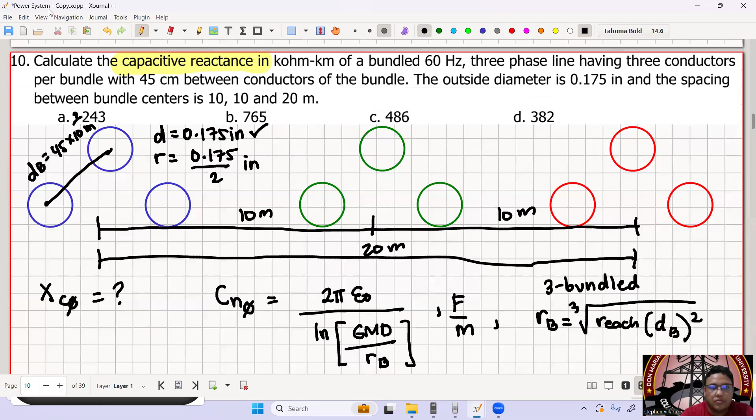So, sige. This is in farad per meter. So, ilan to? So, 0.2. So, 0.2 tuloy. 2 pi, I should say.

So, 2 pi times constant 32 all over ln ng cube root of 10 times 10 times 20 all over cube root ng 0.175 over 2 times 39.36 multiplied by 45 times 10 to the negative 2. So may nakalimutan tayo ditong ilagay. Dapat naka-squared yan.

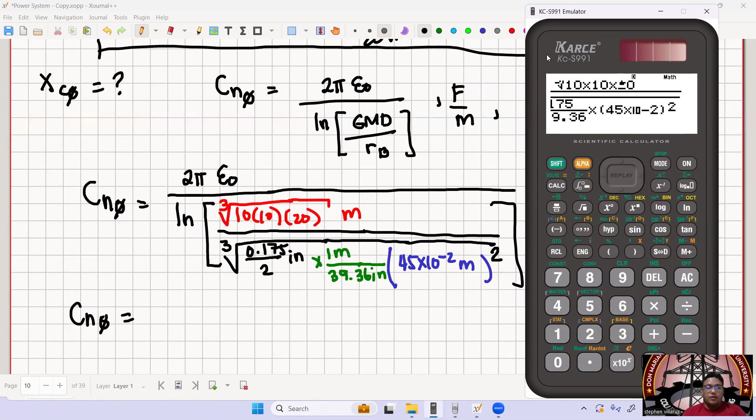Okay? Yung distance of bundling natin. Yan, naka-squared. Kasi nga, 3-bundled na to. So, this is in farad per meter. Syntax error. So, anong kulang natin?

Kulang ng parenthesis. Ayan. So therefore this is now 1.0903499 times 10 to the negative 11 farad per meter. So gawin na lang natin siyang kilometer kasi yung ating length is naka-per kilometer.

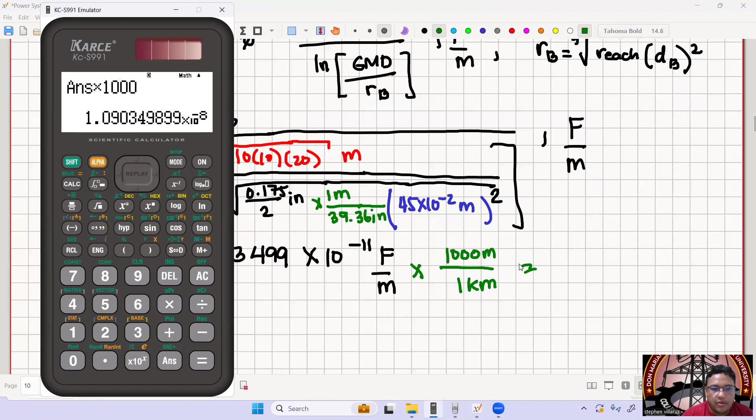Okay, so this is now multiplied by, in 1,000 meters, this is 1 kilometer. So multiply lang natin ng 1,000. So therefore, this is now 1.0903499 times 10 to the negative 8. So this is in farad per kilometer.

Okay, so yan na yung gagamitin natin to get the XC per phase. So this is now equal to 1 all over 2 pi times yung frequency na 60 Hz multiplied by 1.0903499 times 10 to the negative 8 farad per kilometer. Ngayon, yung 1 over 2 pi FC dito, this is ohms. Ohms yan. Ngayon may per kilometer pa tayo dito. Ang mangyayari dito sa per kilometer natin, tataas. Okay, so therefore this is now, it will become ohm kilometer.

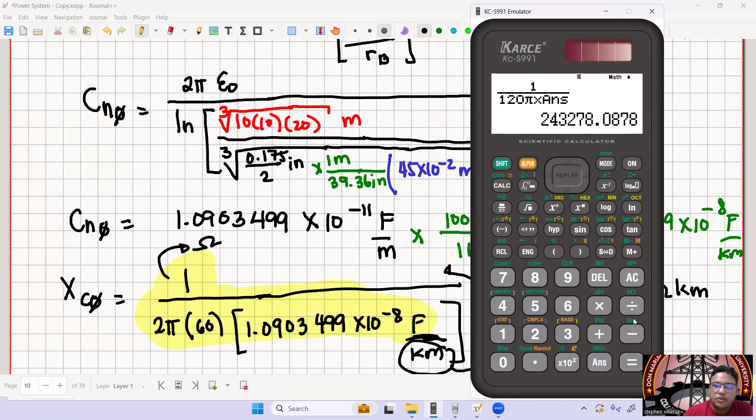Okay, so therefore this is now equal to what? So this is now 1 all over 120 pi times answer. So ito siya, 243,278 ohm kilometer.

So yan na ba yung sagot? Hindi pa. Ang gusto natin, naka-kilo ohm kilometer. Okay, so therefore convert natin yan sa kilo ohm kilometer. So 243,278 ohm kilometer, multiplied by, in 1 kilo ohm, that is 1,000 ohms. So divide lang tayo ng 1,000. So this is now equal to 243.278. This is in kilo ohm kilometer. So this is letter A.

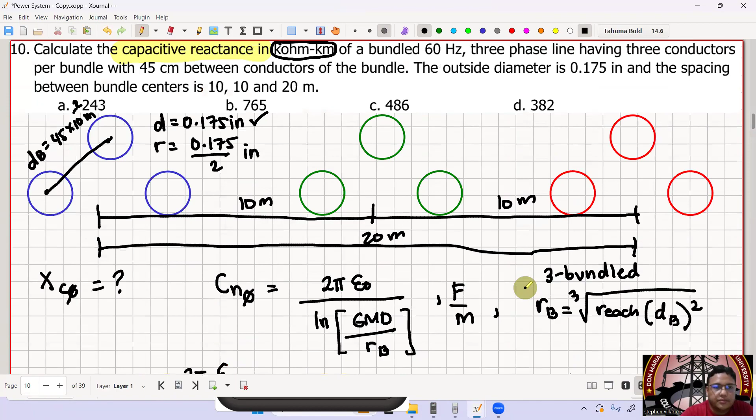Okay, next tayo, number 11. So a single circuit, 765 kilovolts, 60 hertz, three-phase transposed transmission line is made up of four horizontally oriented ACSR conductors. So apat na conductors per phase, four conductors in bundle per phase. So the bundle spacing is 45 centimeters. So yung ating dB is equal to 45 centimeters. And yung phase spacing natin, so ito, this is 14, this is 14. So yung buong to, 28.

Ayan, so may kulang pa tayo dito sa problem na to, no? Paki-troubleshoot. So the conductors have 1.382 inches in diameter, and GMR of 0.5592 inches. O yan, o tama na yan. So determine the transmission line's capacitance in microfarads per kilometer.

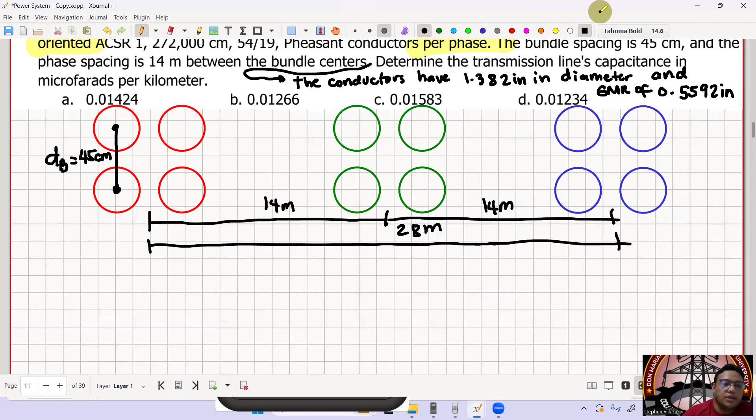Okay, so take note po, bundled ulit yung conductors natin. So gamitan rin natin ng capacitance to neutral na bundle. So this is now equal to 2 pi times EO all over ln ng GMD over yung radius of bundling natin. So this is in farad per meter.

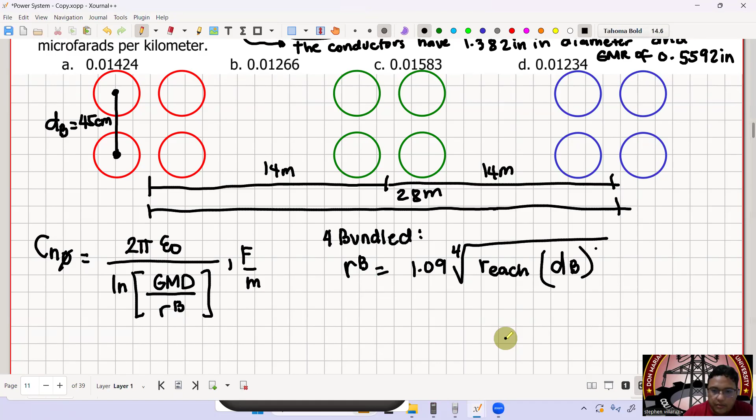Okay, whereas kapag 4 conductor or 4 bundled siya, ano ulit yung formula ng radius of bundling natin? So from our formula a while ago, ito yon. Okay, so 1.09 times the fourth root of r each multiplied by distance of bundling, the quantity raised to 3. Okay, so lagay natin yan dito.

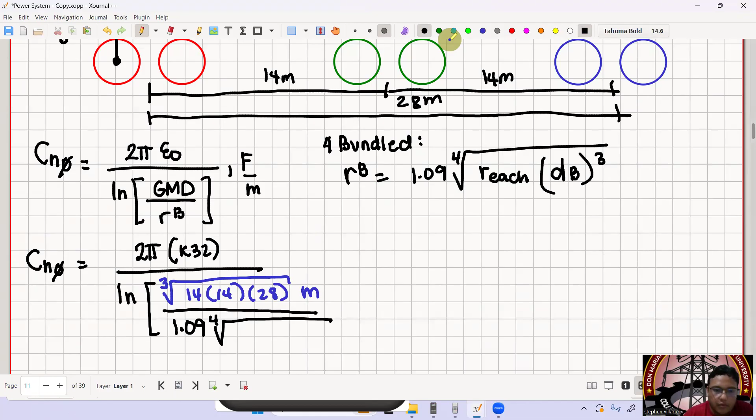Okay, so therefore now, capacitance to neutral is equal to 2 pi times constant 32 all over ln ng GMD. So that is now cube root ulit. So cube root ng 14 times 14 times 28, and this is in meter, all over radius of bundling natin. So that is 1.09 times the fourth root of r each. So yung r each natin, meron na ba tayo? Wala pa. So diameter yung binigay sa atin, di ba? So diameter, that is 1.382 inches. So kailangan natin yung i-convert sa radius. So yung radius mo dyan is 1.382 divided by 2 inches. Okay, ayan, so 1.382 over 2, this is in inches.

So pero kailangan pa natin yang i-convert kasi nga meters yung nasa taas. Okay, so therefore convert natin to. Multiplied by, in 1 meter, that is 39.36 inches. Okay, then yung ating distance of bundling, so 45 centi. So this is now 45 times 10 to the negative 2 meters, the quantity raised to 3. Okay, so this is now in farad per meter.

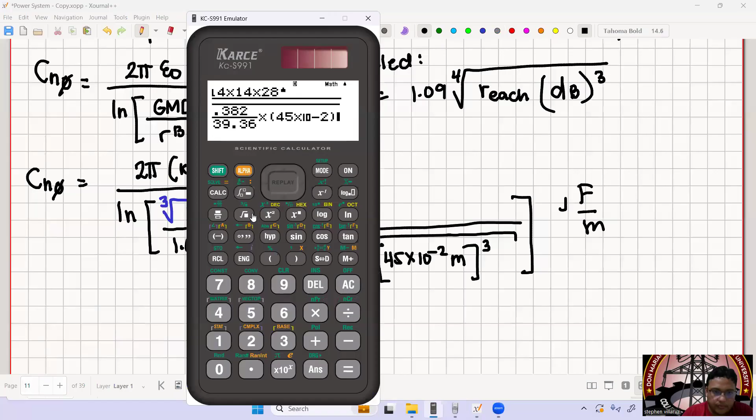So sige, compute natin. So therefore, 2 pi times EO, constant 32, all over ln ng cube root ng 14 times 14 times 28, all over 1.09 times the fourth root... mali. So 1.09 times the fourth root of 1.382 over 2 times 39.36, multiplied by 45 times 10 to the negative 2, the quantity cube. So close parenthesis. So therefore, this is now equal to what?

Capacitance to neutral per phase is 1.26627 times 10 to the negative 11 farad per meter. Pero ang gusto natin microfarads per kilometer. Okay, so anong gagawin natin dito sa farad per meter?

Gawin natin siyang microfarads per kilometer. So multiplied by, okay, in 1 kilometer, this is now 1,000 meters. So this is now equal to what? So times natin ng 1,000. Okay, so 1.26627 times 10 to the negative 8. This is in farad per kilometer.

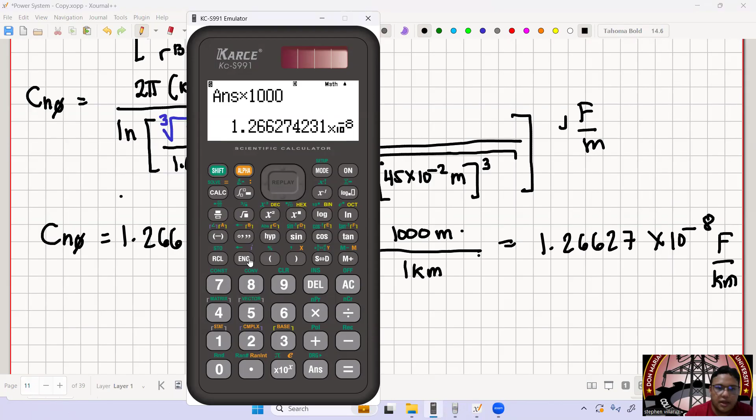Okay, so gawin na lang natin siyang microfarad. So gawin natin tong times 10 to the negative 6. So shift ENG lang tayo. Ayan siya. So therefore, this is now 0.01266 times 10 to the negative 6. Shift ENG. So yan na, so this is now your answer, in microfarad per kilometer.